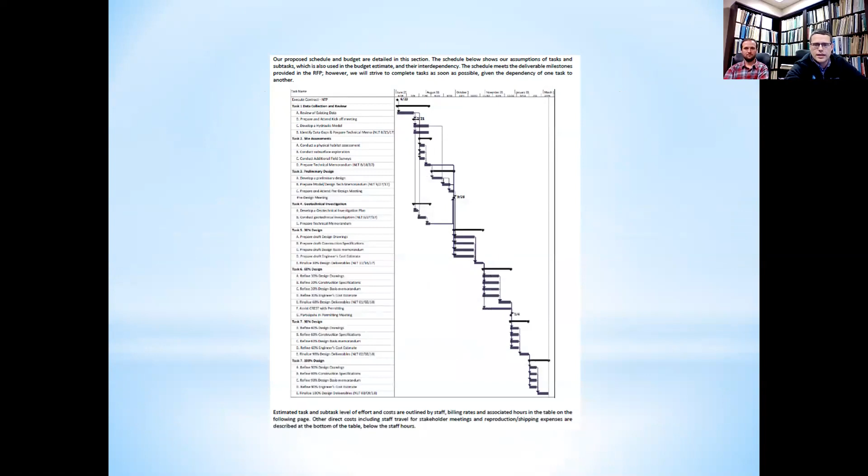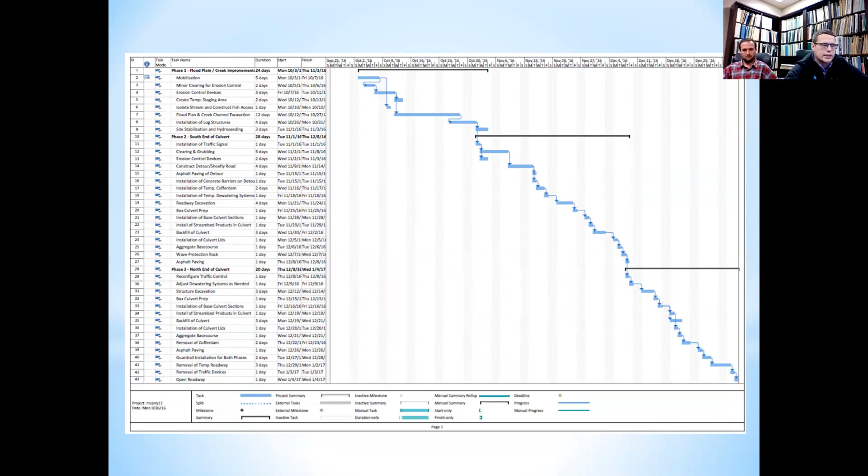You're probably familiar with these, commonly displayed as a Gantt chart. These can look a lot of different ways, but they break everything down and give you a really good visual technique. It's the go-to tool for most project managers when they want to get a quick estimate of the time it will take to complete all the project activities. There's a lot of pros to the Gantt chart - it's easy to view projects, very adaptable, and has the ability to set accurate deadlines and define dependencies, and many more.

The basic project development life cycle starts in planning, design, implementation, and aftercare, and it's a constantly developing cycle. You're always leaning on lessons learned and building on that for the next project. But these are your main 4 topics.

The CREST project life cycle is slightly different, because we're focusing mostly on habitat restoration for juvenile salmon.

The project development typically starts off with site visits, recon, word of mouth, talking to local landowners, things like that, or past project lists that have been created by past project managers looking to implement these restoration projects. The GAIL - Micah's familiar with that - stands for the Get After It list, and that was a list of projects that looked like they had really good restoration potential. CREST has been working our way through that list pretty effectively in the last 8 to 10 years, so now we're having to get a little bit more creative and try to find new projects.

Once we've identified a project, we start our landowner outreach and see if the landowner wants to be on board. If the landowner wants to participate in restoration, we typically get them to sign some sort of acknowledgement form, and that gives us permission to go to our funders and see if we can get this restoration project on the ground.

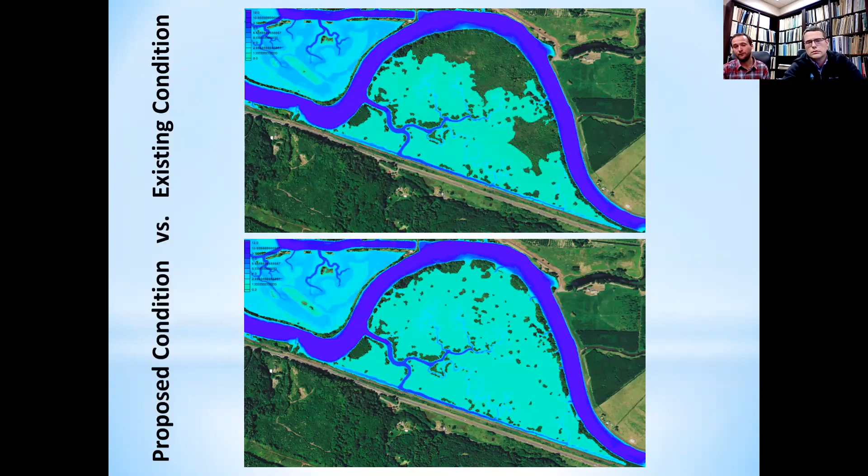So what you're seeing is the model showing, if you do breach this, all this new area shown in light green is newly inundated for food web connectivity as well as fish passage.

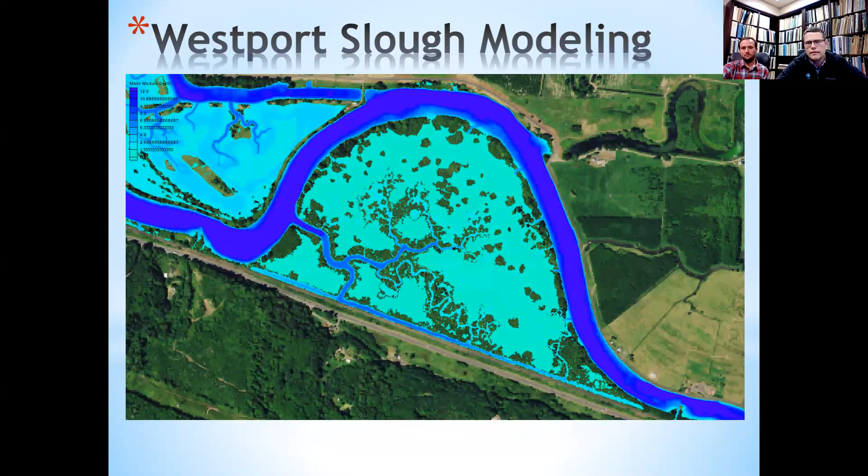Really what you're seeing here is not only fish passage in and out of this really high quality wetland, but you're also moving water in and out, supporting the flux of organic materials out into the slough, whereas it was formerly isolated and trapped on site. Those organic materials support the food web - not only the bottom of the food web, but also prey export and other cool things. Just thought I'd show you guys that real quick.

So here's the site, and what you're seeing here is the levee wrapped around it, which is where all the trees are currently. In the interior of the site, it's all this really high quality scrub shrub wetland. It's in really good shape, almost 100% native species. There's some fringe reed canary grass on the margins, but it's just a really high quality site that currently fish are only accessing from one spot.

So we start moving through our alternatives analysis. You can do nothing - the site's in good shape, but it's just not maximizing the potential it could have. Alternative 1 is typically do nothing. We usually don't spend much time on that because obviously we want to restore the site.

Alternative 2 that we came up with for Westport Slough was 3 breaches. Here's the goal map. We came up with 3 breaches, and we were looking to see how that would restore the connectivity and the hydrology. It really wasn't showing us the modeling that we wanted to see.

It took longer. So we looked at another option, and that was 7 breaches and channel excavation, which is what I just showed you in the modeling. That did an amazing job and restored the site.

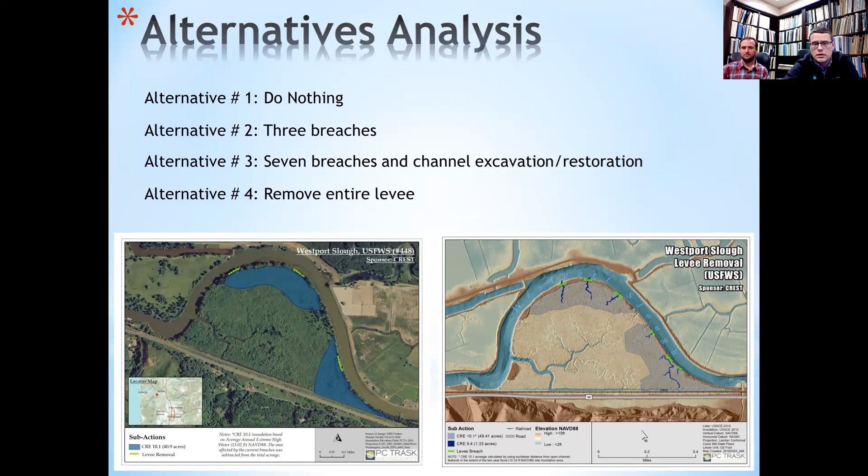The fourth alternative we usually come up with is a really big pie in the sky alternative. And as you can assume with each of these, the alternatives get more expensive as you go up - do nothing, obviously, is free, but they get more expensive and more complicated. With this case, we decided to go with alternative 3 because it achieved the pie in the sky outcome, but at a much more feasible and much reduced price.

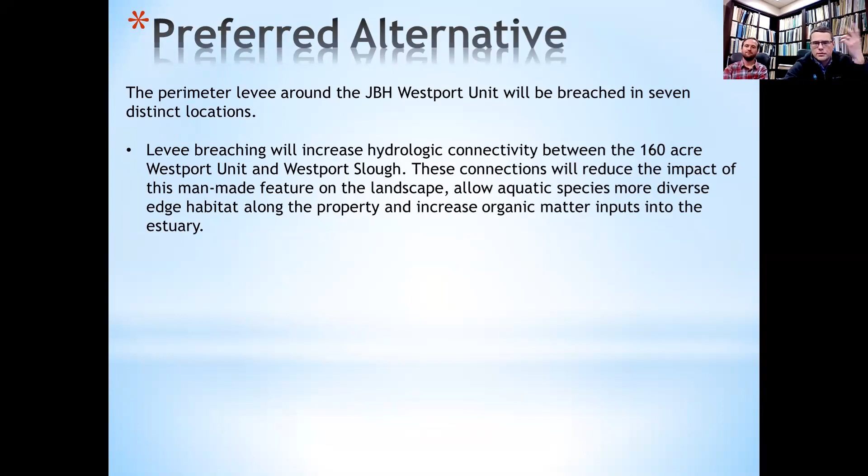So our preferred alternative was these 7 breaches, to restore the hydrologic connectivity. We also did 4 pilot channels - a pilot channel is where we don't excavate the channel as far as it's going to develop, we just excavate a small channel, usually with a steeper slope at the end, which promotes head cut and allows that channel to develop on its own and advance. In some spots they don't advance at all - it's kind of a mixture of art and science. You don't really know where they're going to naturally develop, but in some areas they can cruise along.

Micah, you'd be impressed to see Fort Columbia these days. It's really moved quite a long ways into that 97-acre wetland complex. That's outstanding, good news. It looks amazing, and the channel's full of all this large wood. I mean, it's incredible. Good.

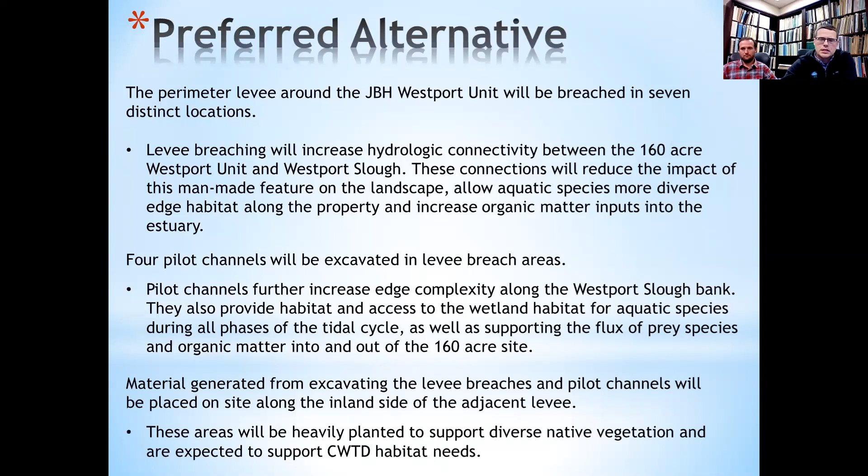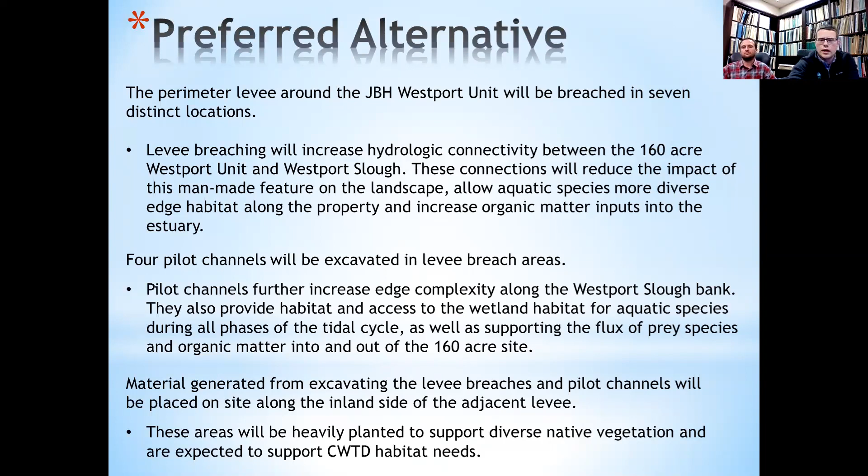The other thing we did is try to keep costs down. One way we could keep costs down - when you've got to breach these levees and remove this levee, if you're on a site that's isolated like this and doesn't have a road right next to it that you can haul material in and out of, we have to come up with solutions to keep the cost down. One of those solutions was to keep the material on site, creating topographic complexity, moundings on the backside of the existing levee that we didn't breach. The idea was that it could also help support Columbia white-tailed deer habitat, a listed species known to be in the area, and this is on U.S. Fish and Wildlife property. So it's achieving multi-species benefits and helping us keep the cost down.

Once we've selected the preferred alternative, it typically goes through 30%, 60%, 90%, and final construction-ready design phases. That 60% design is used for permitting applications.

This just kind of gives us an ability to streamline the project timing to try to move these projects along quickly. As you know, salmon are a listed species, and the quicker we can do these restoration projects, the quicker they can benefit from them.

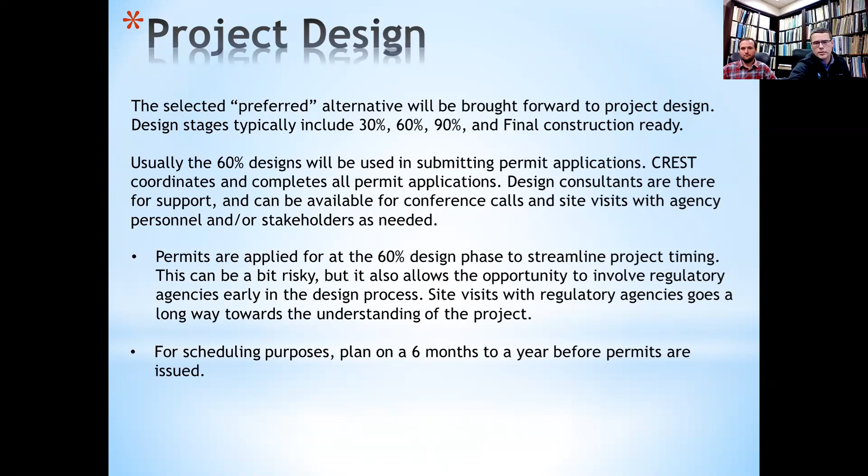I'll let Tom go into permitting in further detail, but I just want to say one last thing: we kind of plan, from a scheduling perspective, 6 months to a year before permits are issued is when we start applying. We apply for permits, and then it usually takes about 6 months to a year.

Yeah, so permitting, so much fun. One of the highlights of our job.

It's the one that I lose the most sleep over, just because there's so much unknown. You could have a really good project, and a certain regulatory agency might have a small issue with the way you design your channel opening, the width of your bridge, or other impacts to other species, and it could get derailed.

So there's a lot of unknown, but we are fortunate in that we are doing restoration and enhancement. So we have a lot of support from our funders and from the regulatory folks who want to see these type of floodplain reconnection projects happen.

I don't need to go into all the details, but there are generally 3 levels of permits that you need to acquire: federal, state, and local.

The federal is typically through the Army Corps of Engineers, and that's going to cover things listed under the ESA, NEPA, Clean Water Act, and that's really going to give you permission to work in wetland areas, work in stream areas, and go into the details about that.

They also cover cultural resource compliance, which is a hugely important factor in all these projects, especially in the Lower Columbia.

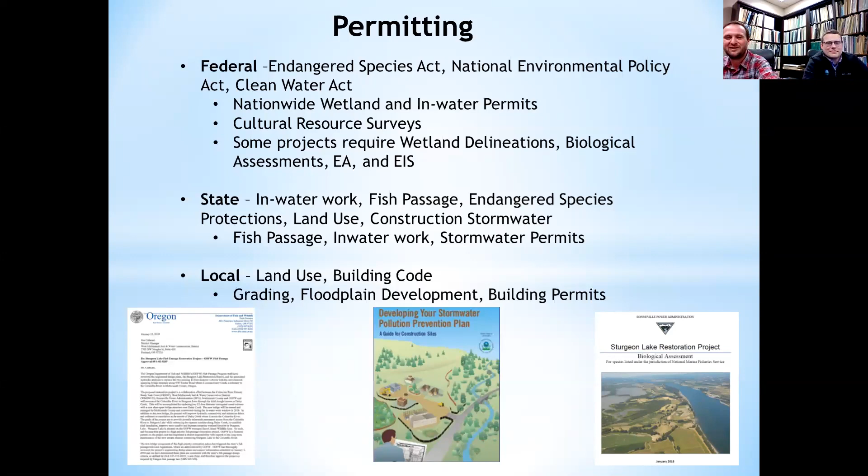But as Jason said before, in general, you need to plan for at least 6 months, if not more. And if you have a complicated project, if you have infrastructure, you're on a public roadway, all those good things, it's going to take even more.

And really, when I fill out these permit applications, or Jason does, our name and our reputation is on the line with these. So we not only have to fully comply with these permits, but we need to make sure that the construction crew doing the project is absolutely following those guidelines and not putting us in violation. Because our reputation is key in this whole thing.

We feel fortunate that CREST has a good reputation with regulatory folks, and we want to keep it that way. We want them to know when we're proposing to work in the water, work in these wetlands, we know how to do it. We're going to hire good crews that can do low impact methods, and we're not going to just go in like a bunch of yahoos and tear everything up. So that reputation is key.

And then just a couple other tips: sometimes they have post-project monitoring in terms of plant survival that you might need to take into consideration, and might need to budget for. And then what we found really helpful is a lot of these permitting agencies will meet with you ahead of time before you submit your permit. So once you have that 30%, 60% design set, you can sit down and hopefully get multiple agencies in the room with you, and ideally get them out to the site as well.

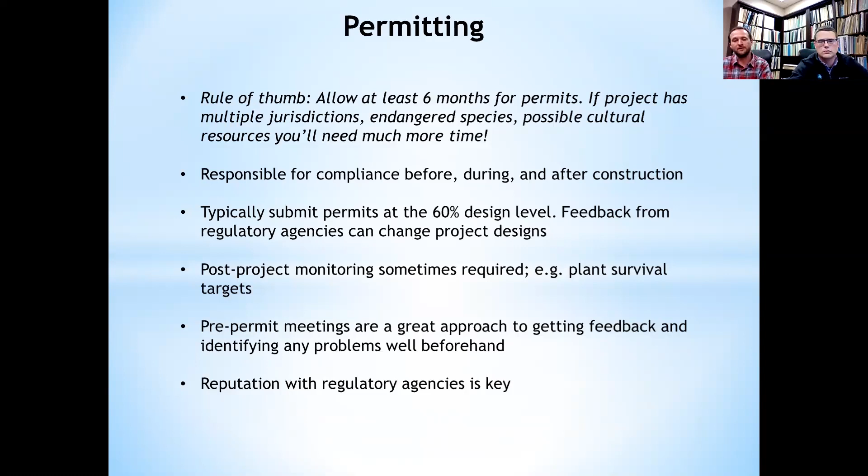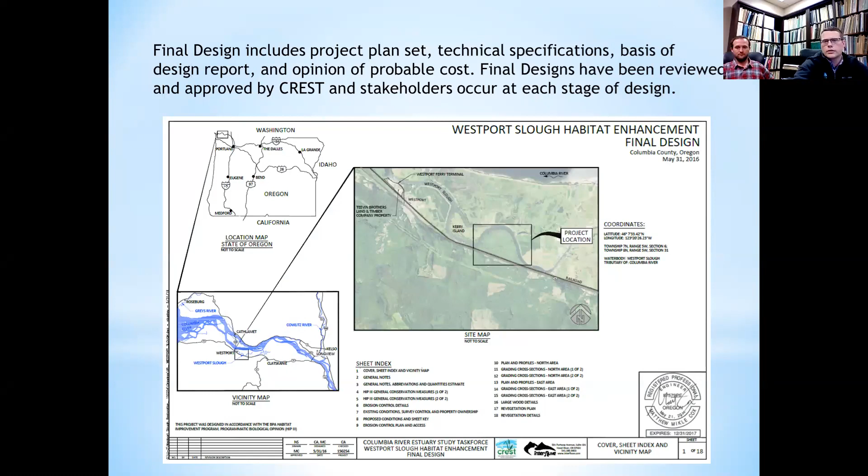Jumping back to scheduling, once we've received the final designs and the permitting stuff's happening, we receive final designs including plan set, technical specs, basis of design report, and the OPC, the opinion of probable cost. These designs have now been reviewed and approved by CREST, stakeholders, regulatory agencies, and so forth. We can start moving into construction.

This is Westport Slough again, and here are our 7 breach sites in green. It looks like you only see 6, but there are 2 right next to each other—here, there's two breaches next to each other.

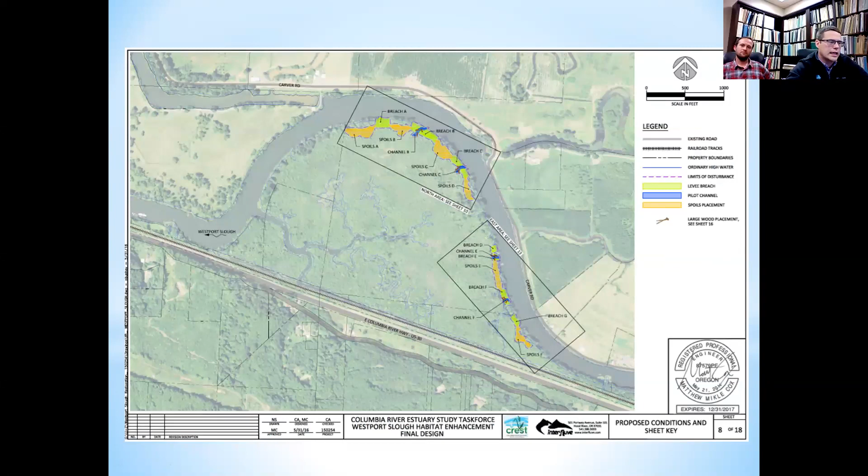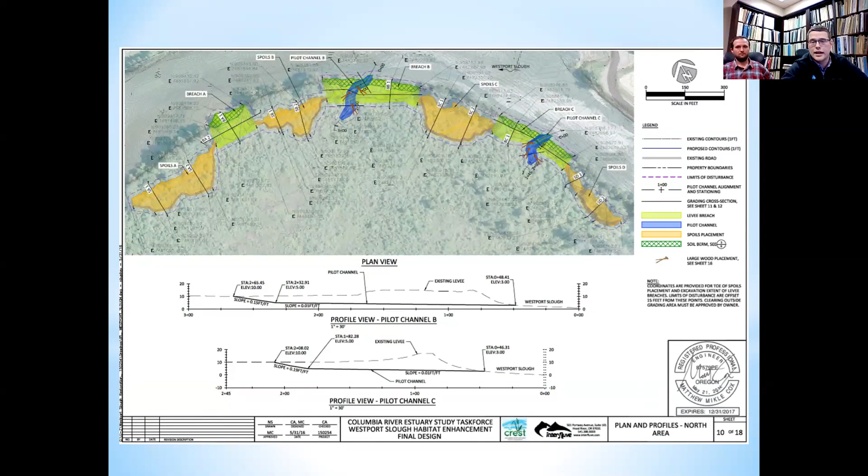The final plans typically include a lot of detail, though these two slides don't have a whole lot. Usually they'll have your plan view, the upper view, and profile views of each element, plus quantity tables and sequencing notes and other information to inform the contractor. You want to do everything you can in these designs to minimize contractor uncertainty, because the second they don't know what they're doing and you're not there to answer it, that's when we get into trouble—but we'll talk about that in a later slide.

The conceptual scheduling for construction—these are really informal, let me know if you have questions about each one. I'll cruise through these quickly. You put it out to bid around 90% or final design. You have a mandatory site visit for all construction projects, whereas for design, once it's out to bid, those aren't always mandatory, but we typically make construction mandatory because it's good to have their eyes on it.

And you answer any of the contractor questions they have about what they're bidding on. You give them a few weeks, and all their proposals come in. We review and score their proposals.

We award a contract. Once the contract is awarded, we always want to bring all the stakeholders, the contractor, and the design consultants to a pre-construction meeting, again, to iron out any uncertainty and make sure everybody's on the same page and has the same vision.

Then, once everything's going, before we can start, you want to get your submittals from the contractor, whether that's your shoring plans, your dewatering plans, whatever that may be.

Then we hire on an outside surveyor, usually to stake, or the contractor can do it. You can build into the contract to have them do the surveying and staking, but we like to do that ourselves and be in charge of it.

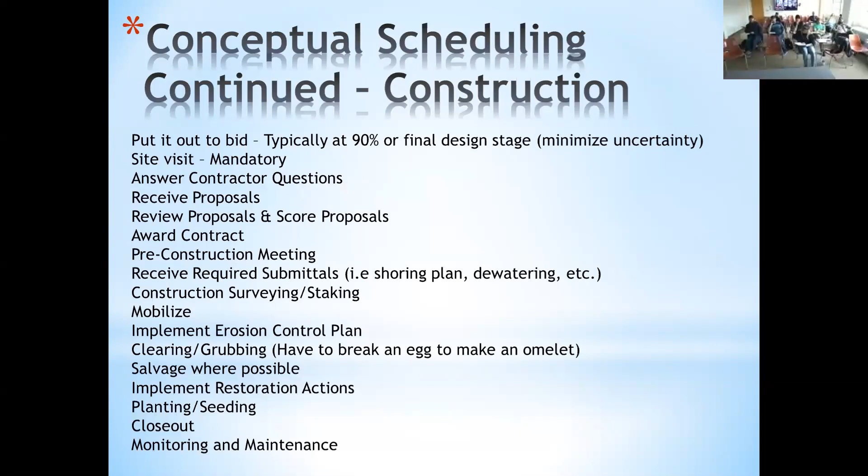So at Westport Slough, as I was saying, access is kind of challenging. So a lot of times we have to create other ways of accessing the site to minimize our disturbance, because if we have a really high quality site that just needs a little bit of improvement, like removing that levee, we want to minimize our impact. We don't want to create a road through this wetland to restore the site.

But what I always like to say—and I think it was Matt Van Ness, or maybe it was you, Mike, I don't know—but we've always said you got to break an egg to make an omelet with these restoration projects.

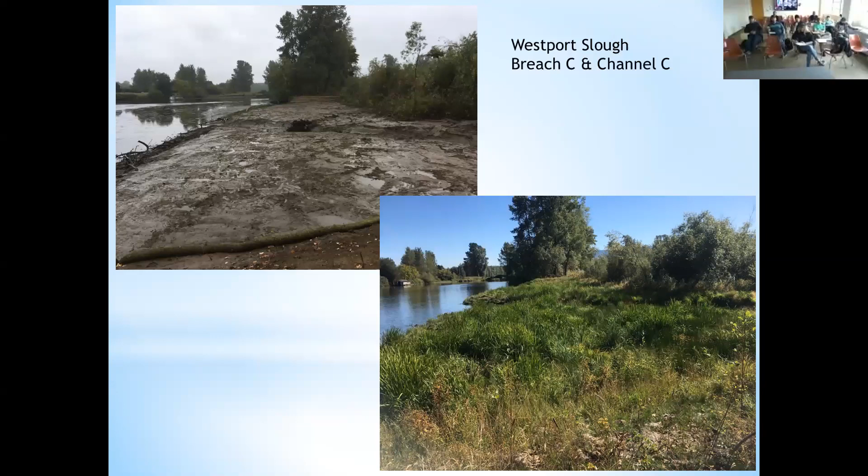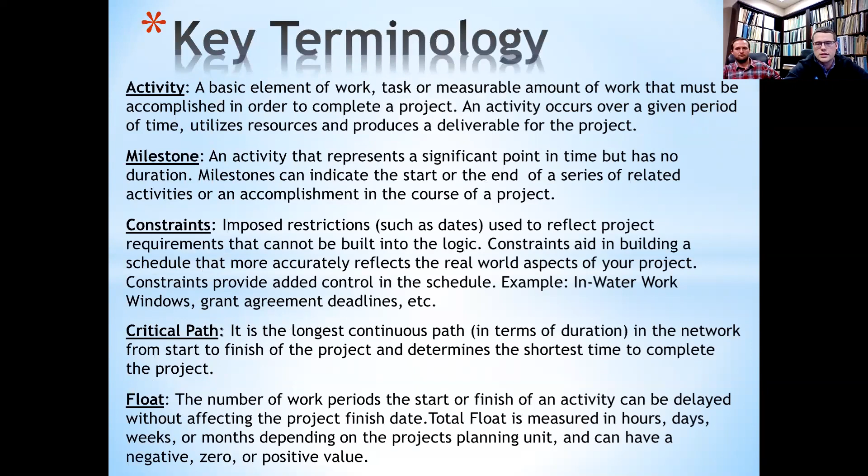So kind of going back into the scheduling terminology, I won't spend too much time on this, but if you guys do have questions about any of these components, let us know. I'd say the big ones here are the milestones—you've got to know your milestones, because those indicate start and end dates of a series of related activities or accomplishments. And then the critical path, the longest continuous path. Constraints, activity, all those things are important, but really in the scheduling world, the critical path and knowing your milestones are very important.

But the one nice thing about sticky notes is that you can move them around, and it can give you a conceptual idea of what you're looking at before you start creating charts and so on and so forth.

So one big thing to always know in scheduling, particularly through design and construction, is you've got to be prepared for change. In design, something can come up—you could already be through 60% design, and then when you start doing your cultural resource survey, you could come across fire-cracked rock or remains or who knows what. Or in construction, a lot of things can happen, like weather, equipment availability, procuring materials, tools, equipment—all these things can impact your schedule in a hurry.

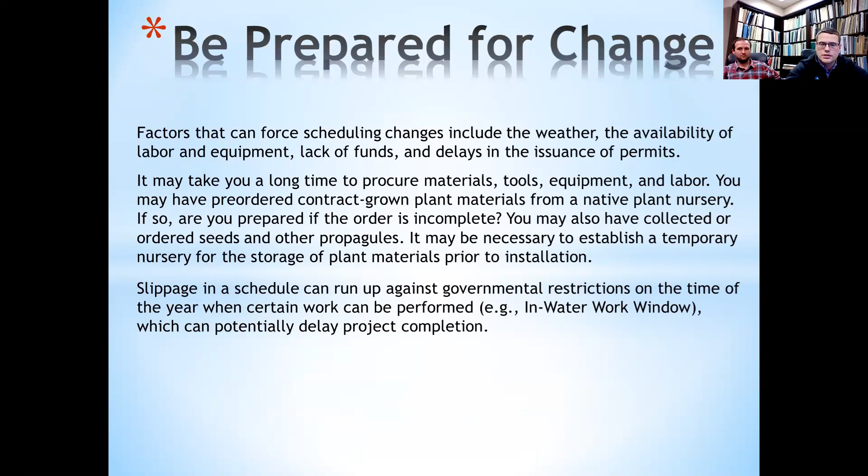Once you start losing control of your schedule, you start running up against your restrictions, like our in-water work window, which typically controls our schedule in large. For the most part, that's one of the biggest confinements we have down here, working on the river and working in these tidal sites. We're trying to help the fish, and the work windows are there for a reason, to keep us from digging and creating turbidity and potentially harming the exact species we're trying to help.

These are just some more details, really going into the nuts and bolts. Some key things to consider: you need the consultants and the contractors to accept your schedule. You need to have weather clauses in there, so you're not getting hit with all sorts of change orders and things later. These are all just things that help you plan ahead.

Some of the keys here—a lot of the times we get these schedules from the design consultants in their proposals, and from the contractors. When we receive their schedules, we want to make sure it meshes with what we had in mind. So there's a lot of things you want to check: is it compliant with your specification requirements? Are the milestones in tune with what you had in mind? Does it work with your critical path to finish the project before the end of your in-water work window? Are all the items included? As-builts are something that are often required from us, and if you don't pay attention to their schedules and deliverables, you can get yourself in a little bit of trouble.

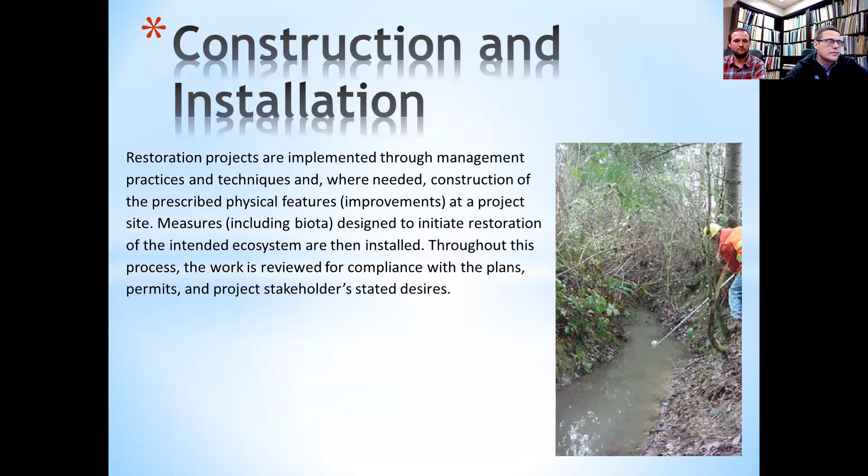We're just going to touch a little bit on implementation and oversight. We've already talked about how the projects are implemented, but this is more the management practices and techniques where needed. Tom was just talking about how we have to cover ourselves and make sure we know exactly what we're getting into before we get into it. That's what these next few slides are going to cover.

It's just a process. Implementation oversight is a process of assuring the quality of project management and delivery. It's a governance role designed to reduce project risks and improve outcomes.

When we talked about the life cycle of the project earlier, it plays an improvement role. Tom has learned so much from the 10 or 15 projects he's done out on Sauvie Island alone. There's all sorts of lessons learned, so implementation oversight isn't only about reducing project risk and improving outcomes, it's also about lessons learned.

One big thing Tom touched on is that you really need to define your role. CREST is in an interesting spot because we've been with the project from preliminary, from a conceptual basis all the way through design, and we know a lot about the project and all the stakeholders involved.

So we're kind of the project supervisor, but we're also kind of the site inspectors, because we hold all the permits and we're the ones who'll be in trouble if the contractors don't abide by the permits or follow the plans. But there are many different roles you can have.

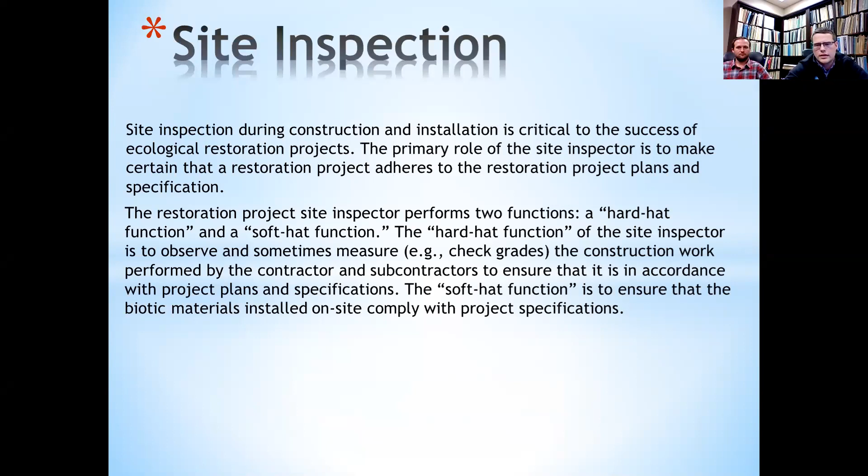This gets into the nitty gritty of it, but there's two things: hard hat functions and soft hat functions. Hard hat functions are like checking grades, whereas the soft hat functions of a site inspector involve ensuring the materials installed on site comply with the project specifications, making sure the planting plans are done right, and things like that.

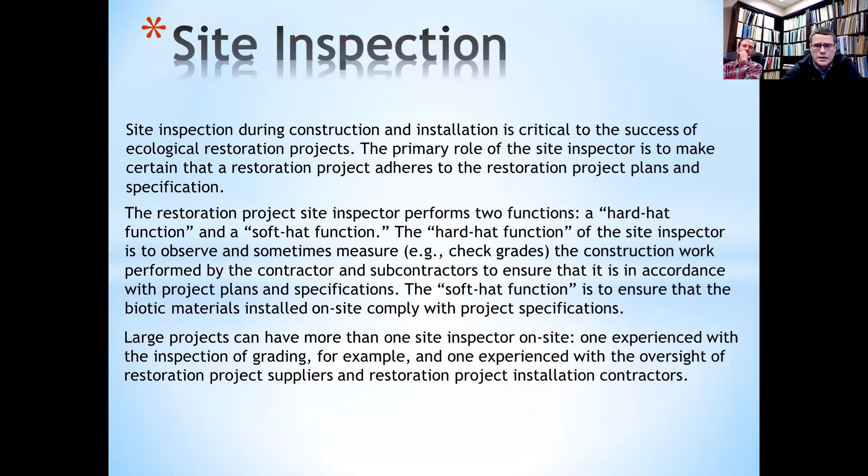On large projects, like Megler Creek, which runs through a state highway, those types of projects will have many site inspectors checking, each focused on one item, like compaction or the roadway, or a geotech checking to make sure the substrate you're putting the culvert on meets the criteria specified in design.

So their role again is just to make adjustments to project plans in the field as situations arise. Contractors are typically trying to save money, that's just kind of their nature. Sometimes they underestimate the time and expense for project implementation in their bid, so naturally they'll try to figure out ways to make cost savings. Sometimes they have good ideas we can take advantage of, but often they're trying to cut corners and do things we don't want them to do. We spent a lot of time in this design, so we need to make sure they follow it.

Some examples are, if they start trying to move in-stream aquatic structures, that gets really problematic, so we need to make sure they don't do that. And if it has to happen, we need to run that by a hydraulic engineer to make sure we're not going to create an erosion problem or a fish passage problem or something else. Some of the more simple ones are swapping out plant materials if they're having availability issues. If some plant stock is not available, we could switch out one species for another, as long as it still does well in our environment. It's native, of course.

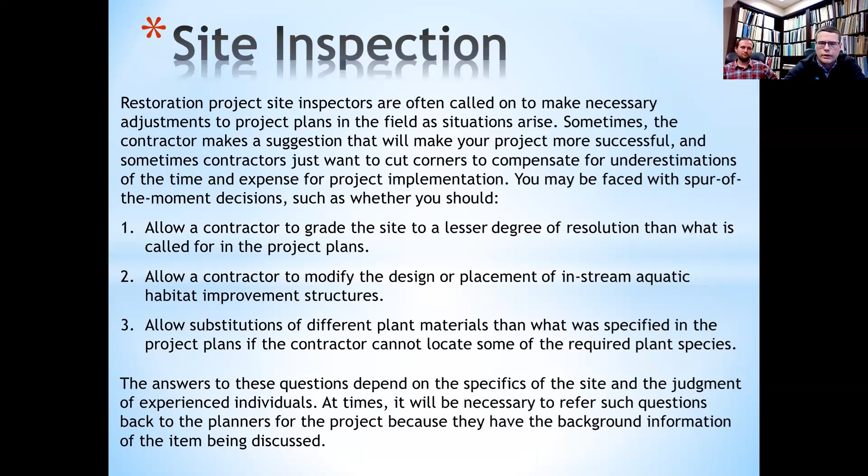Another key thing, one of the biggest parts of implementation oversight, is just documenting everything. It's a way to make sure you're doing everything right. It helps inform as-builts later on, but it also covers your bases, because if questions arise later and people ask you about it, having a solid log documenting everything that happened and when it happened is a good way to cover your bases.

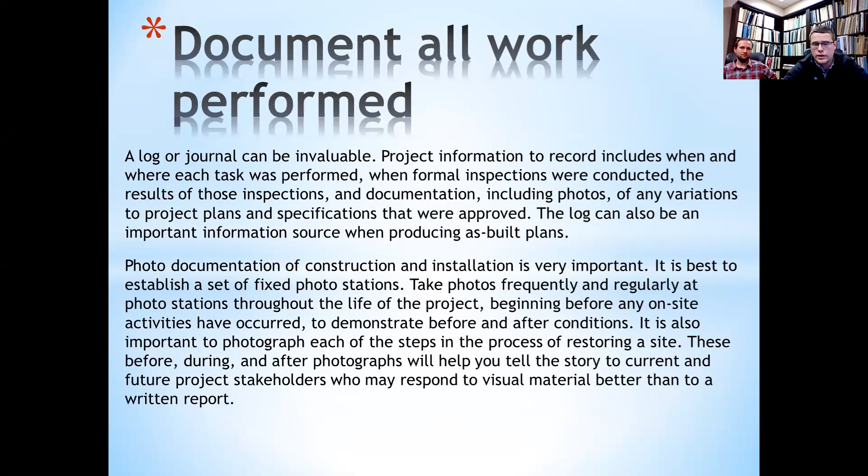Photo documentation is a great way to do it. You can set up a remote sensing camera and it can take pictures of each construction activity, and when the construction activity moves to the next site, you move your camera to the next spot, keeping a log of what's happening on site. It's also a fun way for stakeholders to see the photos, because they often can't be out on site all the time.

You often run into challenging conditions, and again this is where that log can come in really helpful. For Megler Creek, we had everything from a snowstorm—I didn't get a good photo of when it had like 10 inches of snow out there or whatever it was—but we had snowstorms, windstorms, and we also had a huge flooding event.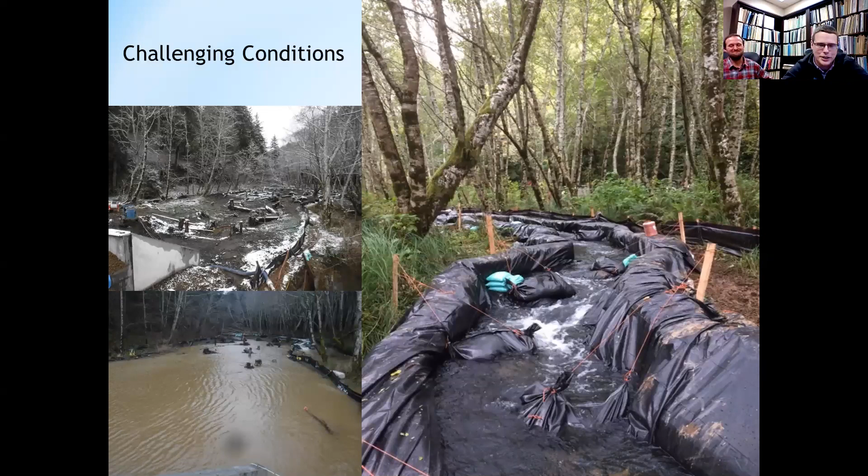When it comes from outside of your project into your project, there's not a whole lot you can do about it. But you have to document it to cover your bases. That's how you document it.

Site inspection has a lot of things, but one key example: a lot of times we have volunteer groups do planting efforts, and some of these people don't exactly know how to plant. They're little plant plugs that have a plastic tube sleeve. If you don't keep your eye on the kids, sometimes they'll just shove those right into the substrate, and the plant doesn't do too well. The survival isn't very good if it's still in its sleeve.

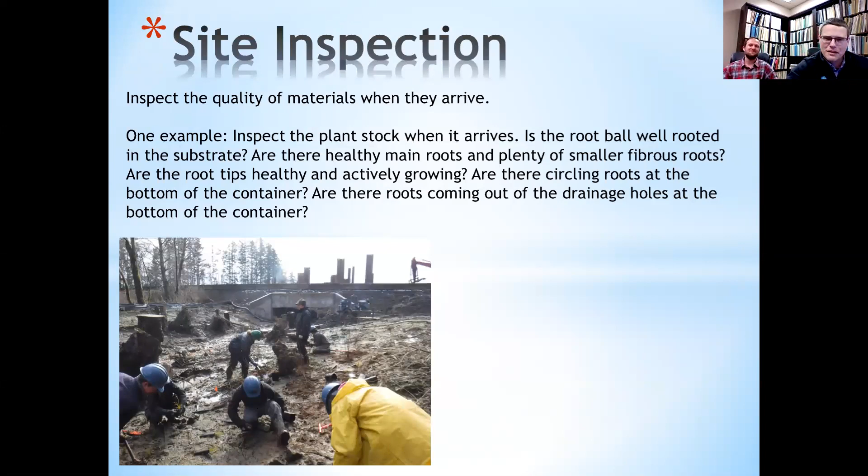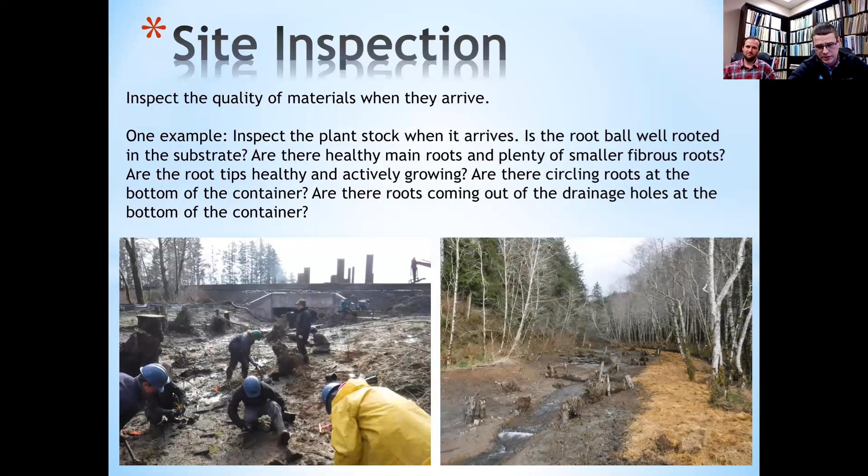Another example of inspection: this is Megler Creek after it was restored. The Park Service originally wanted us to put straw mulch on the entire site. Once we were doing the planting plan, they said, can we do an experimental design, half the site mulched and half not, to see how the vegetation responds with and without the mulch? That's fine, but it wasn't clear to the contractor, so instead of cutting the quantity in half and doing the proper application, they put it all on one side. We had almost a foot deep of mulch, and the veg didn't do very good, so we had to go back and correct that.

These are just some of our site inspection forms, more from a construction stormwater perspective. These are things to cover your bases when you're out there and make sure you're doing your due diligence as the permit holder.

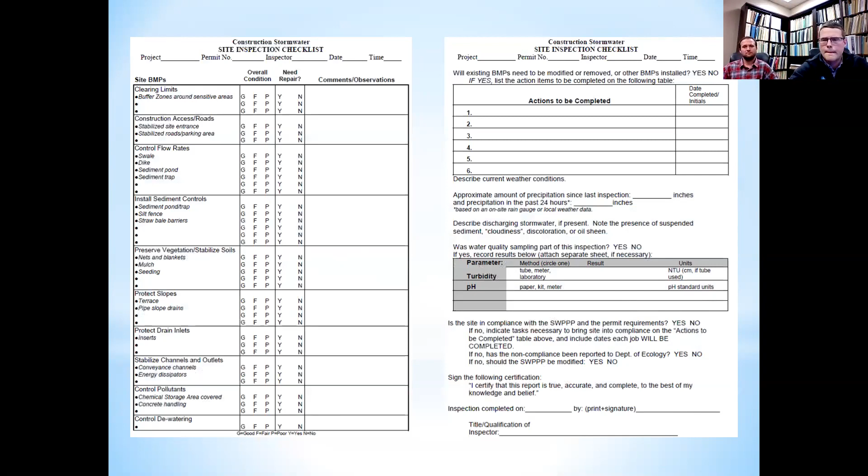Another thing that naturally happens, touching on implementation oversight and scheduling, is delays. There are small delays, but also critical delays that impact milestones or completion dates. It can make you run up against your in-water work window, sometimes even requiring a variance to extend it. Key things to ask when a delay happens: was the event a delay, how big of an impact will it have, and who was at fault - was it our designs and specifications, or something the contractor was doing? Delays often result in change orders, so you have to know.

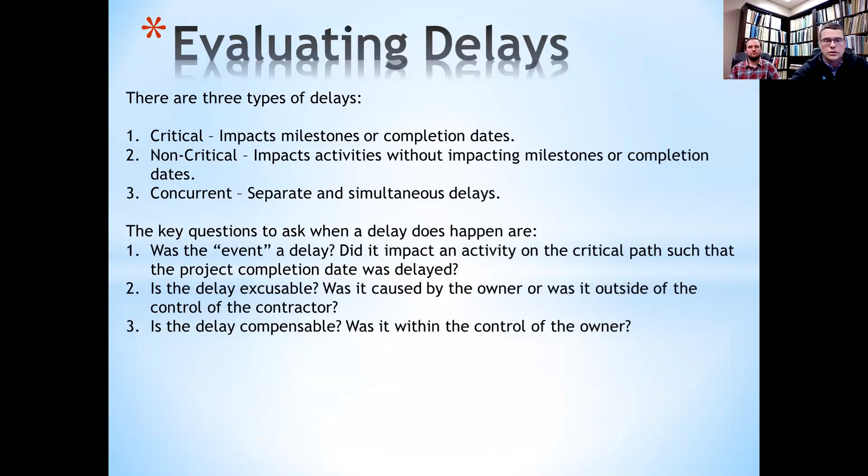Know who is at fault.

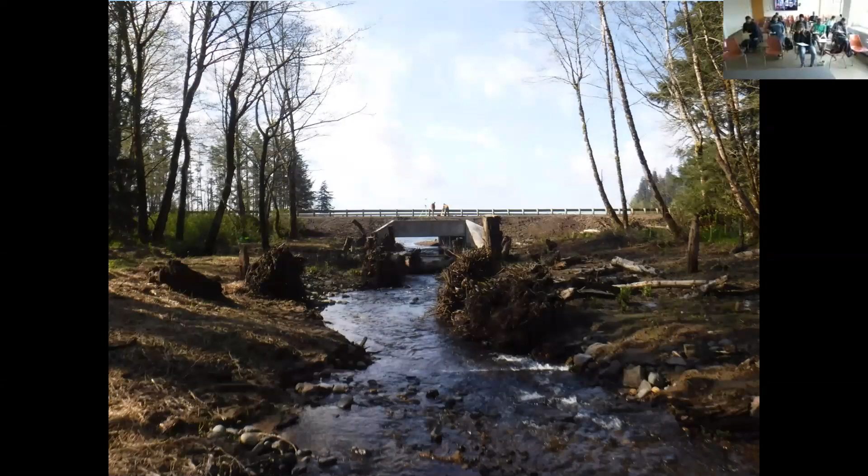This is after Megler Creek was all complete, and I'll go through these photos. It was flowing out a 24-inch pipe that was only 15% passable to salmon, and now it's 100% stream simulation, 100% passable during all tidal conditions for fish. It opened up 1.8 miles of spawning habitat in addition to migratory habitat for upriver stocks that have to pass through the estuary twice. This provides an opportunity for them to get off the main stem and into good intertidal rearing habitat where they can get big and strong before their life at sea.

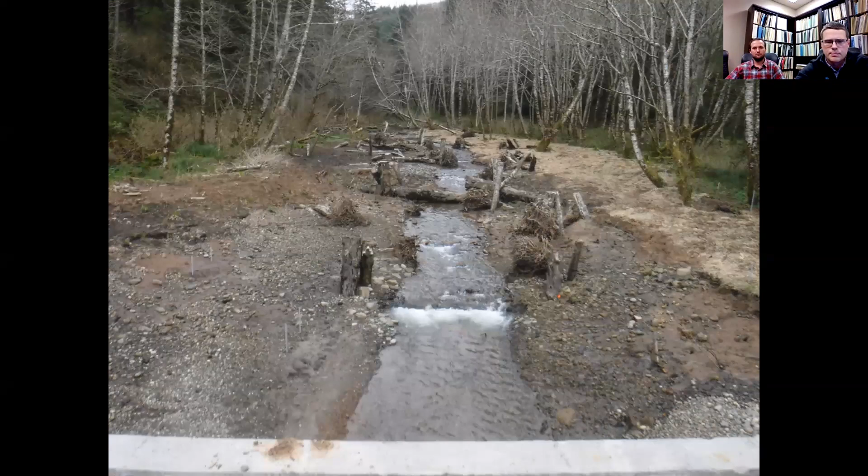Here's some of the wood habitat structures we installed. This is before the planting plan, so unfortunately I don't think I included a post-planting photo, but that's the old culvert the fish had to pass through beforehand, which was only 15% passable. It doesn't look passable at all, but believe it or not there were fish in there beforehand—now there's a lot more. So that's before and after.

And then I just want to try this out. Micah, I don't know if it'll work, it's just a really short video. Okay, I don't think it's going to work.

That's too bad. But it basically shows that right after the project, juvenile fish were hanging out in the pools. Narayan got in there with a snorkel and a camera and found a lot of coho hanging out in the pools. It's pretty cool to see, after all this time spent on the project, the fish coming back.

So that's on the Washington side, up from the bridge, right? Correct, in Washington, about a mile east of the bridge from Astoria to Washington. No, I stood right there. To give you all some perspective, it's been a long time since I was at CREST, but I was taking regulatory folks and funders out to this site to begin the feasibility dialogue.

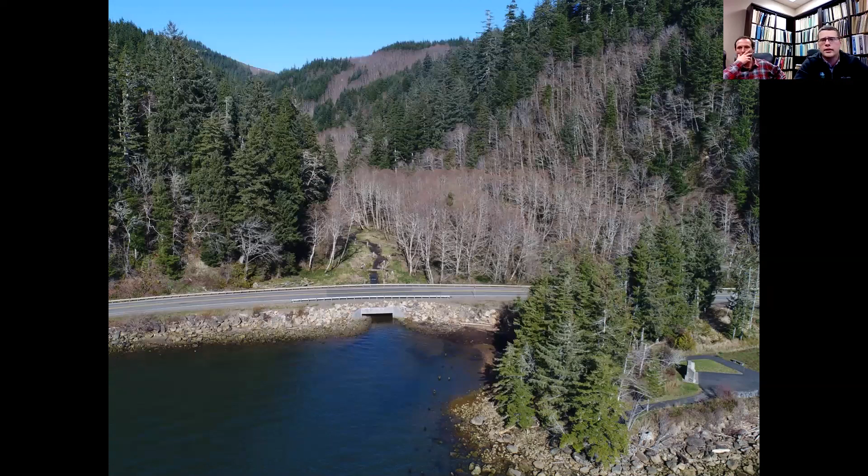So these things take a while. Start to finish, how long for that project—4, 5 years? It depends on when you define the start, what you classify as your starting point, but roughly 4 or 5 years. I'd say design alone was 2 or 3 years, and construction took about 4 months, but everything leading up to that took a lot longer. This project was identified, Micah, probably around 2008, and it wasn't finished until 2017.

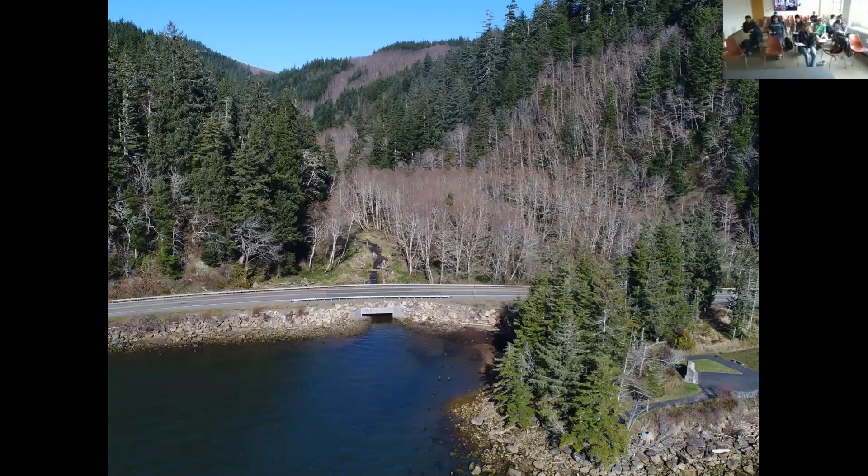Yeah, but heads up, we have about 5 minutes. I'm moving on to Tom. Well, Jason's really giving me a lot of time, but I've got another case study. Sue him. Yeah, I'll bring lawyers in.

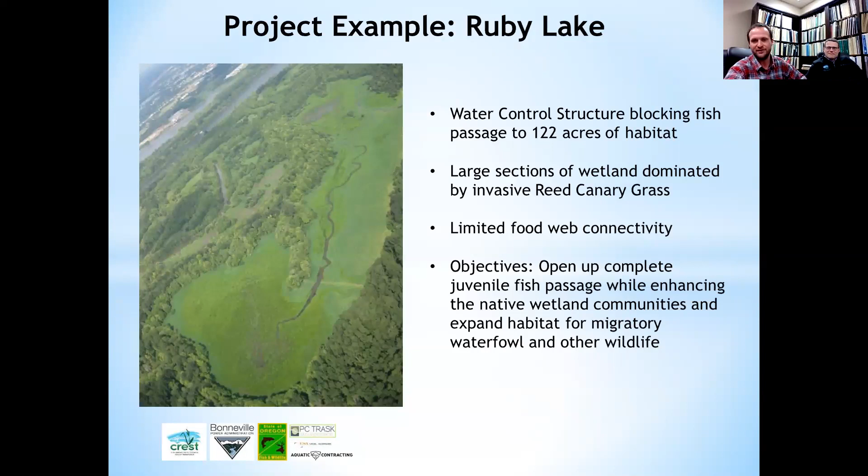This is just an innovative design we came up with. There was this wetland out on Sauvie Island, about 122 acres, with a water control structure installed that was blocking habitat access. It was dominated by invasive reed canary grass, and it's part of this larger network of backwater sloughs and wetlands.

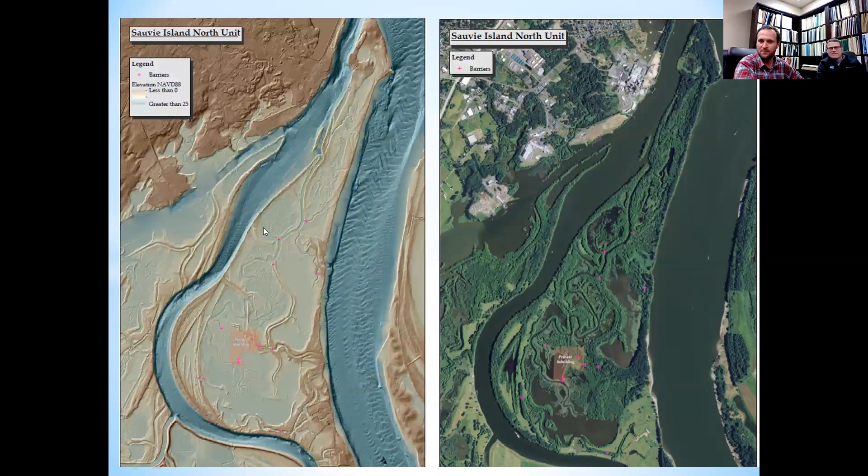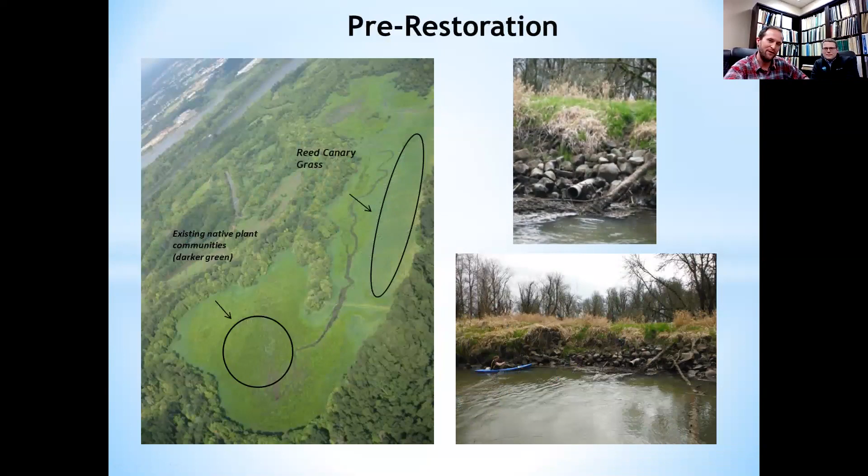I'll go through real quick—this is the Columbia River here, and you've got this nice backwater refugia for out-migrating salmon to come in. You can see this area is all dominated by reed canary grass at higher elevation, and lower elevations are dominated by wapato, bulrush, and other natives. This is actually the water control structure—basically a giant dam in the way—and that's a lovely fish egress pipe, which is only about 12 inches.

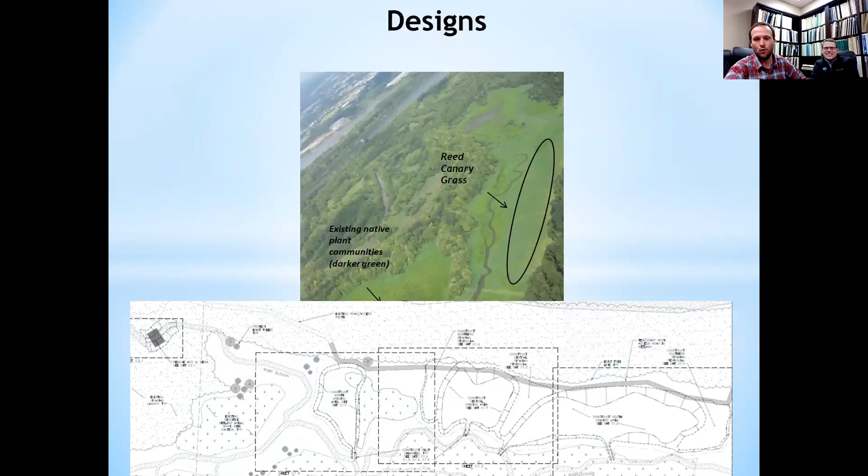So we basically came up with a design where if you were to lower the marsh plain about 2.5 feet, you would extend periods of inundation and duration of water. That would have positive benefits for native vegetation, as well as fish access, and also migratory waterfowl would have a lot more opportunity areas.

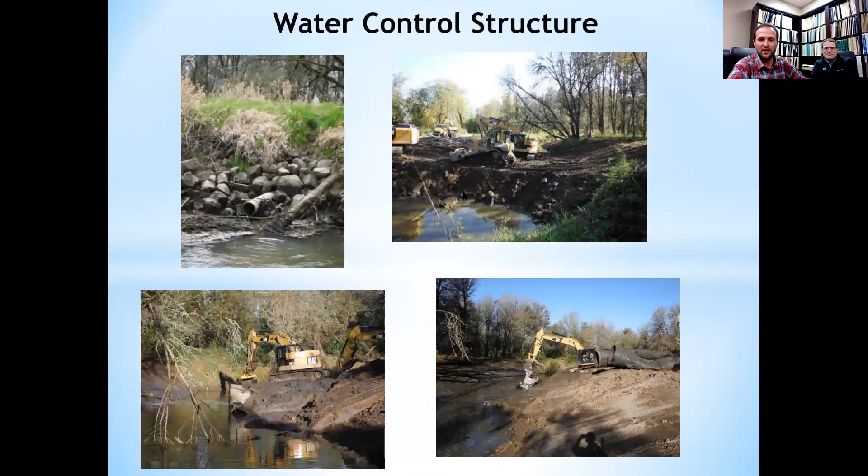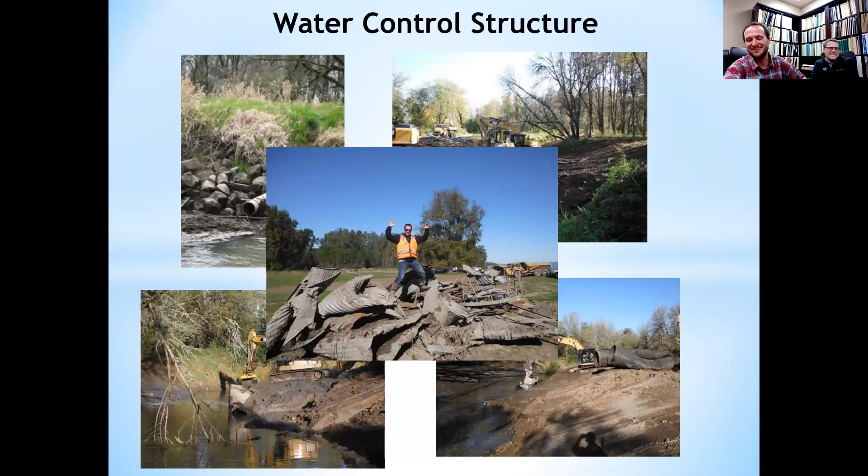So I'll go through these pretty quick. Basically we did our isolation, and this is us ripping out this structure in sections. And then it was a very beautiful day taking all this stuff out of the stream and onto the mainland. Here's some pictures of us actually lowering the elevation of the marsh plain. We moved 40,000 cubic yards over a 10-acre area we lowered in elevation.

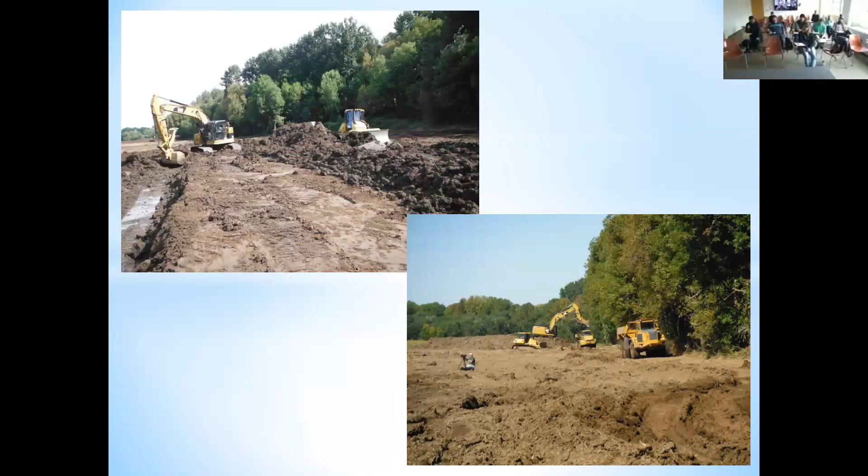So was that actually a restoration to a previous condition, or was that just a design target for that change in elevation? It was a restoration in that we were returning fish access to the 122 acres, but it was an enhancement in that even with the removal of the water control structure, you were still going to have reed canary grass unless you lowered the marsh plain elevations. And that has to do with the contemporary river hydrograph and the management of the dams.

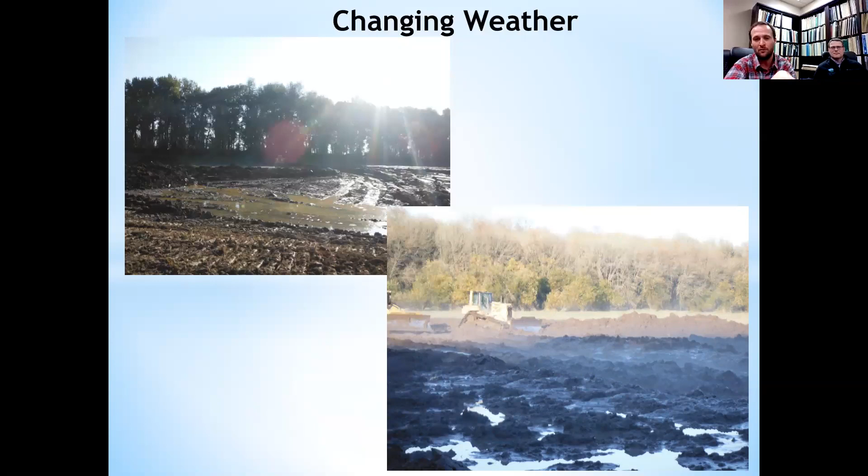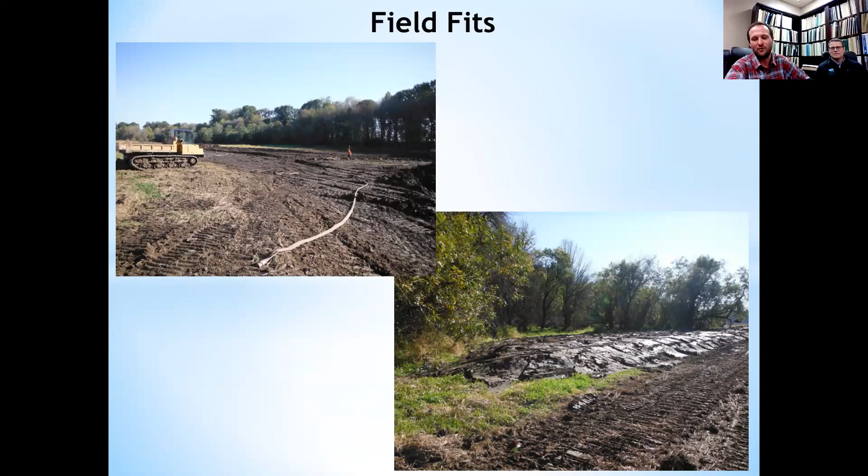Correct. So, I know I'm running out of time, but no project is without challenges. We had horrible weather, even though it's sunny in this photo. Everything got bogged down, we got haul trucks stuck in the mud, seemed like everything was lost. And then we had a really nice October, and we were able to complete it. But basically, these are the areas that we lowered.

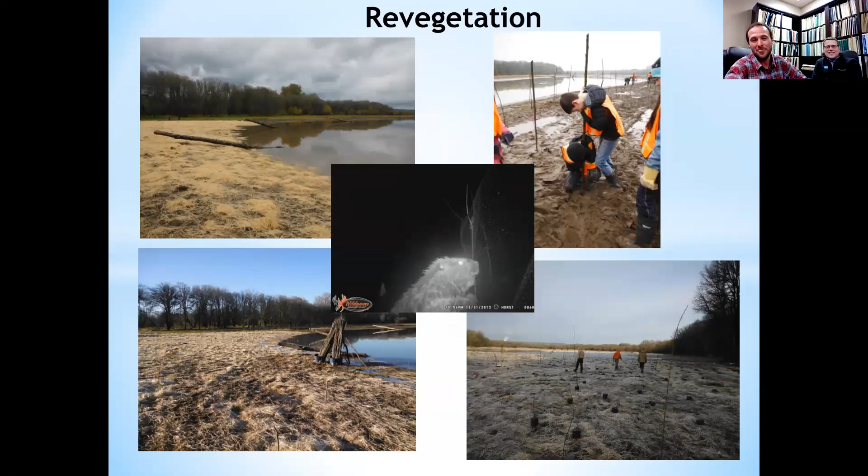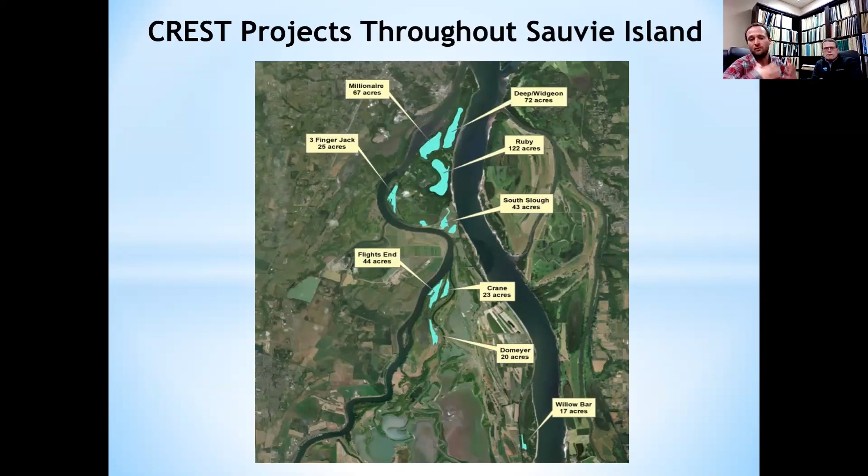And just real quickly, this was the first project of a 5-year sequence. And that 122 acre project with all of its benefits really helped me build the trust with the landowner, the Oregon Department of Fish and Wildlife. And it's just led to project after project after project. As of now, I've done 9 projects over the last 5 years, just within this short geographic area, connected over 430 acres of habitat. So again, going back to your reputation, your ability to get projects completed on the ground, it can lead to really great things and really reconnected mosaics of restoration.

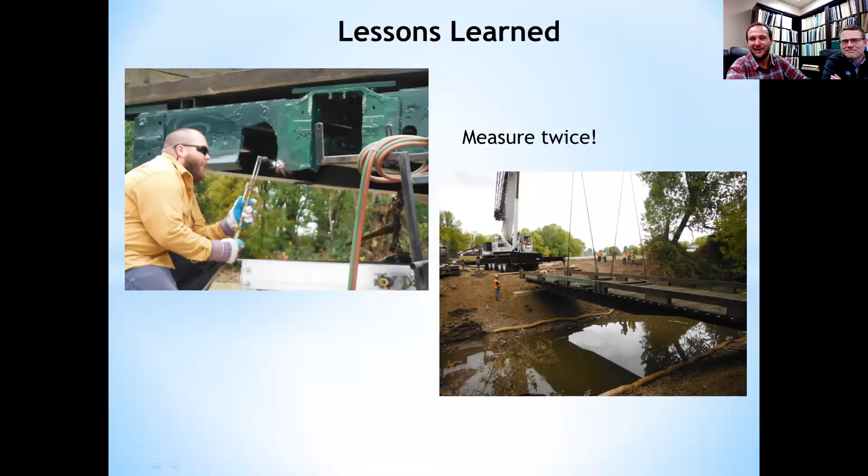I'll quickly just say, a couple quick lessons learned, and I'll let you guys go. If you buy a railcar bridge - that's an old railroad car that they turn into a deck, they put a timber deck on it - make sure there's no little nubs on the end that you have to do some field fitting blowtorch on. Perfect example: we had a crane out there, we had the contractor out there, and luckily we had an ODFW employee with a blowtorch to make just that final field fit. And then also expect the unexpected. I'll just leave it on that.

This is a cultural resource that we found on another one of my projects. Literally we were digging out this levee, and this stone bowl came rolling down right into my lap, basically. Luckily we had an archaeologist available, and we were able to work through it. But you never know what'll come up, so try to plan your best, but also have contingency plans for your contingency plans. And I think that's it.

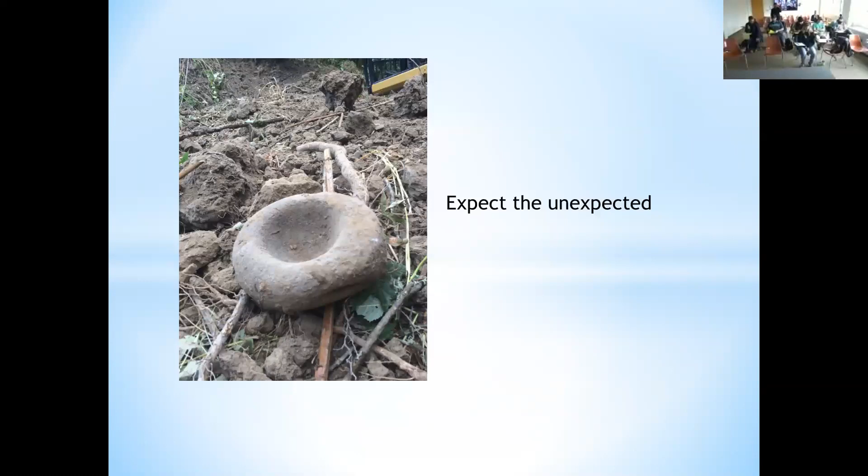Yeah, Micah, you can email us with questions. I know we didn't really give you time. Yeah, we'll do that, we'll follow up with you as needed. Okay, that's really wonderful, thanks guys. Thanks, I'm really stoked to see that method.